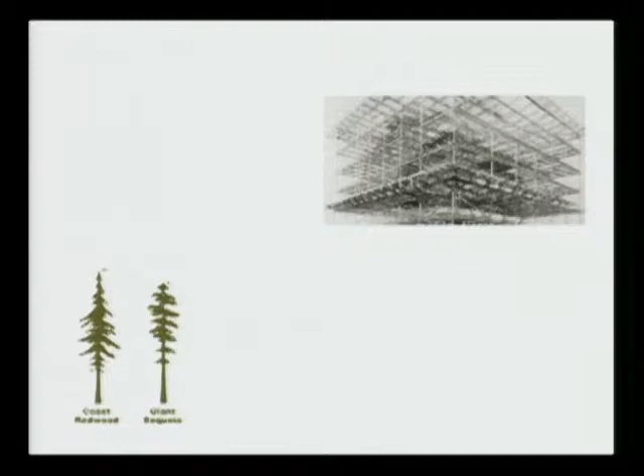Buildings are kind of like that too. We didn't have tall buildings until we had the physical resources—the structural systems, the mechanical systems, elevators, the ways to transport people and resources up high. So our built environment is reflective of new understandings we have of our control of resources.

We even begin to understand these systems happening long term, beyond our lifespan. When a giant sequoia dies, it opens an opening in the forest and you get large groves of trees growing around it. Our cities aren't so dissimilar—when large keystone things change, we respond and marshal resources in ways that reflect that, though we're not always conscious of it. But with technology expanding our understanding of change over time, we've been able to see some of these things, especially in the built environment.

Arguably, this has led us to some pretty interesting conditions, places we haven't ever been able to occupy before. We live in environments that have been previously uninhabitable. That presents some really interesting opportunities for us, but it also presents a risk that we become disconnected from things we used to take for granted, understandings of our environment that just came from being situated within those environments. Now that we have the power to overcome them, what do we choose to do? How do we use our resources appropriately?

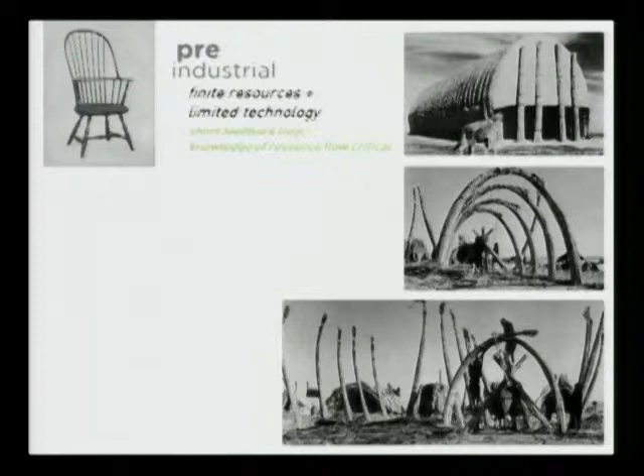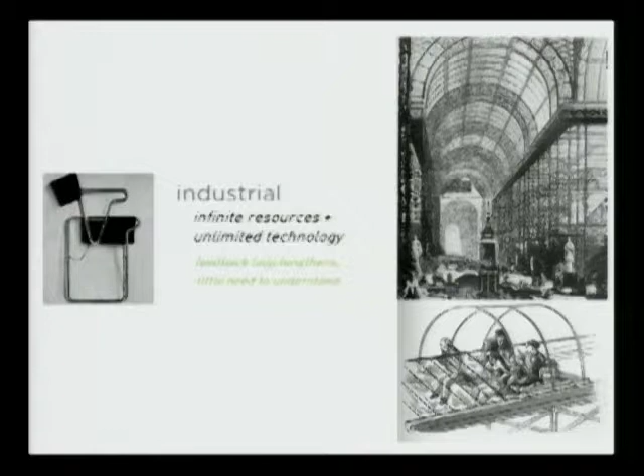And you can look at architecture as having some of those qualities too. Certain architecture results when you have limited technology and finite resources. We often refer to this as vernacular architecture, but it can happen in any scenario. Certainly with the Industrial Revolution and the disconnection, the creation of building trades and building professions—architectural profession, landscape architectural profession—are products of this period of specialization.

And then lastly, a kind of new sense of needing to look at the bigger picture and ask larger questions, because we recognize that feedback loop is not there anymore, and we need new means of understanding how we relate to our environment because we've made it in a way that we don't have to. So if we don't have to understand it, how might we choose to understand it? We have to be more attentive to our feedback loops and to our environment.

We shape our buildings and they shape us. So I'm going to kind of shape this outcome by shaping our buildings, by shaping this particular space. And we have to acknowledge that they do shape us.

So let's think with architecture. We've thought with pictures, we've thought with artifacts, let's think with architecture. And ask some questions: can a building be a tactile demonstration of ecological principles? Can it show us things that we might be blind to and might not see otherwise?

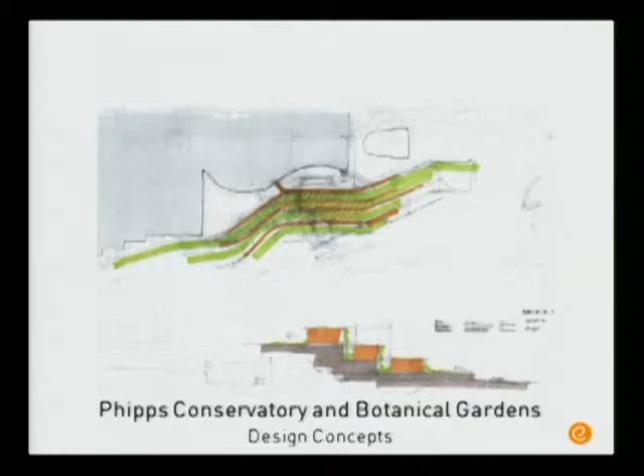So it was out of those sessions that design concepts are generated, and an amazing thing happens because the mechanical engineer is thinking about parking and landscape design, and the landscape designers are thinking about where the ducts are going to go and where airflow is coming out. Everybody has to think from their expertise but in somebody else's shoes, and that's a really important thing to happen.

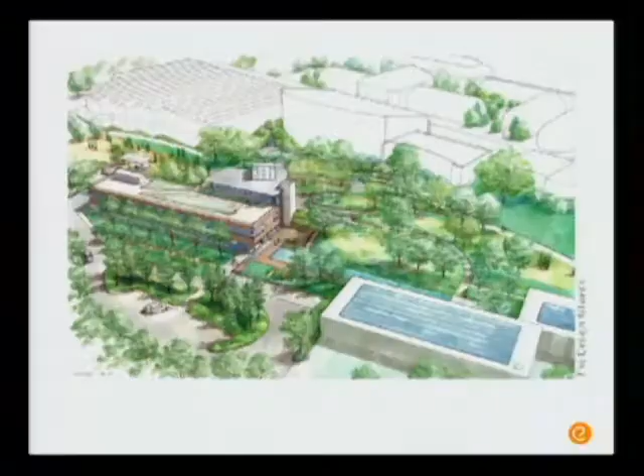So the resulting thing, if you remember those buildings in the photograph, those are down here. They're reused. That was a commitment that came out of this early charrette integrated design process. Unequivocally, Phipps was committed to saving those buildings, so that put everybody on the same page at that time. What it resulted in was an office and classroom space, extending the visitor experience out of the conservatory with both this building and the landscape part of it.

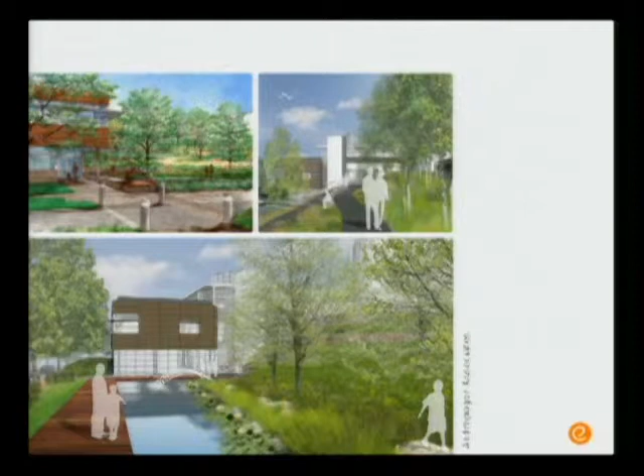And so the building itself that's coming online has a lot of interesting features. But the features couldn't have happened with just the systems alone - it's not a very big building, I think 21,000 square feet. The systems aren't so high tech that they're things you don't already have here on campus somewhere, right? But it's in the way that they work together that's where the special sauce of the LBC is, because if one thing isn't working, other systems are not able to capture their return based on those things working together. So let me walk you through some of these things.

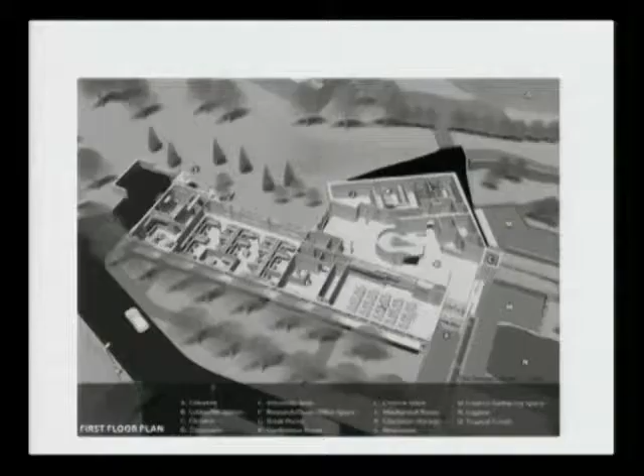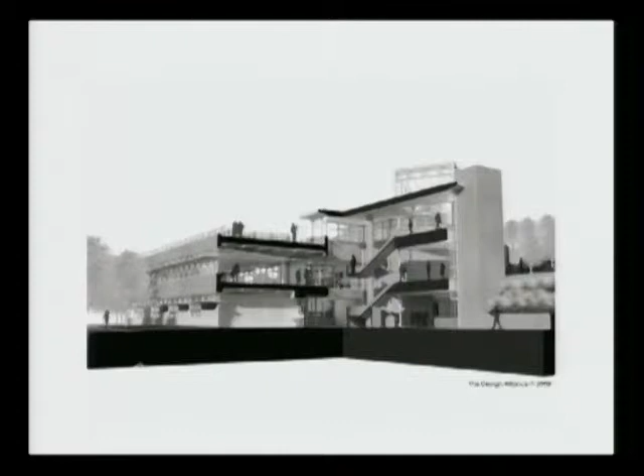This is the floor plan, just a little bit of the classroom space, then office space, and then a green roof demonstration space on the upper floor. It has things that are important for understanding what the possibilities of this space is.

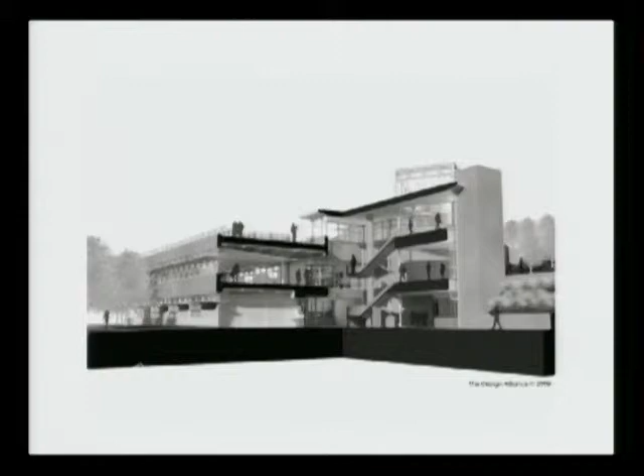For instance, this tall tower, the upper part of that massing, is a stair tower, and one of the things that the client and team said is, what if that thing doesn't have to be fully heated and cooled? Nobody's desk is in there, we just walk through that space, and we might even have some plants and living systems in there that would not want it to be that warm or that constantly monitored. So what if we just take that thing offline? We don't have to condition it to the same level as everything else. Let's talk about some of the other kinds of systems and occupancy matches that we can make.

But one thing that the team came to, and in this other project we're working on which is just the beginning stages of Living Building Challenge, it seems reified that this is an important step to take for Living Building Challenges - you have to work the passive strategies before you work the active. A lot of times we get excited about a technology and we want to do it in the project, but ultimately, the concept of negawatt we were talking about at lunch, it's the energy you never have to buy. If you can create a building that is as sipping lightly as possible, then you don't have to buy that extra solar panel, and there's your return.

I think it's probably true for here, but in Pittsburgh, the most efficient building is a box with no windows. That's probably the thinking behind that school building that I showed you. We know that's not an option. So there's a balance between understanding performance, human occupancy needs, health concerns, aesthetics, and therein lies the essence of the design process - figuring those things out.

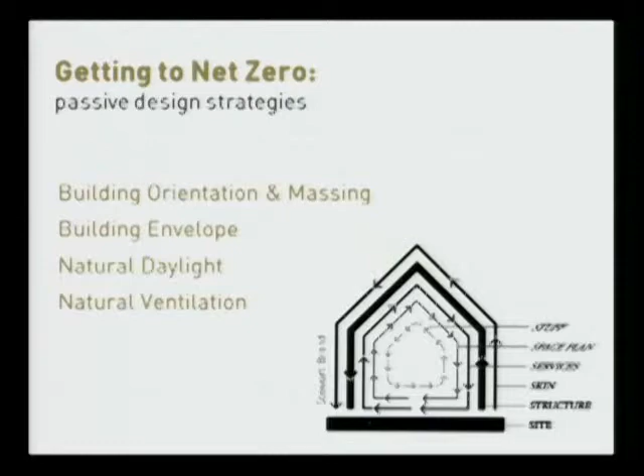So when we're making decisions on getting to net zero or living building challenge, certain things have to be done well from the beginning because we're not likely to change them. Truthfully, stuff, a solar panel can be stuff, right? We're really into that now, but 10 years from now there's going to be a technology that will outperform it by 20 times. That's a thing that's going to change frequently. So designing to allow for those shearing levels of change is really important. But 20 years from now, we're not going to change where that building's located and how it is.

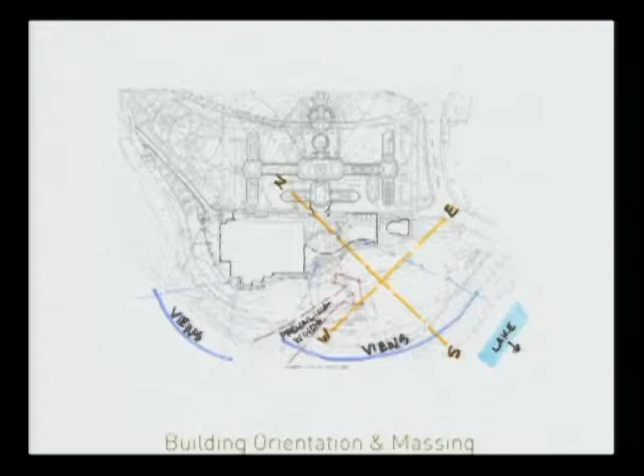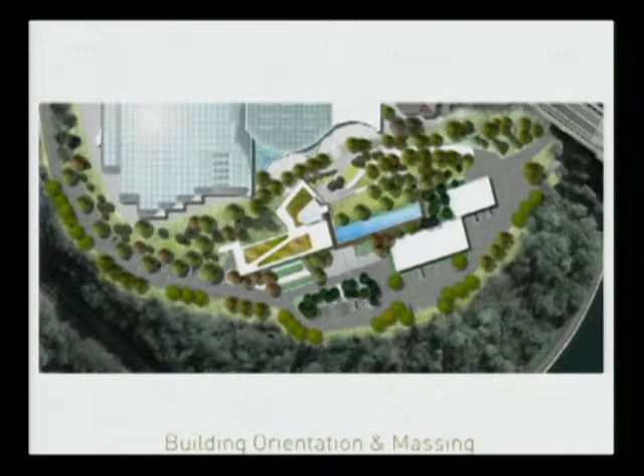So out of this process resulted some ideas of preferable orientation and massing, kind of relationship to the site and the park that surrounds it, and how to get parking out of the way as much as possible—things that are less likely to change. Thinking about building envelope, saying if we're creating this condition to the south, we better deflect light into the space, shaping our ceilings, things like that. I think the hospitality, the Marriott building, has some of these things also at work there.

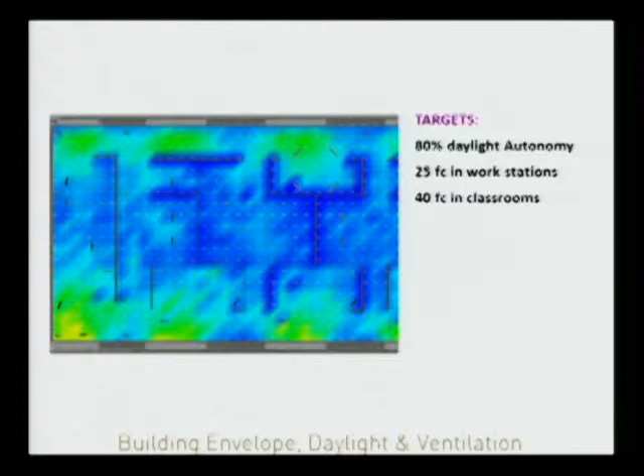One of the interesting things, one of the things I don't think living building could happen 20 or 30 years ago, is that we have a much better opportunity to do modeling and understand how systems perform, because you're always in a predictive role. You have to figure out how lighting's going to influence your HVAC, how much electricity you're going to have to buy, because if you're doing living building challenge, you have a direct feedback loop of having to understand how much solar panels you're buying for that. So you need to be able to model these things and be confident in that, and our tools today allow us to do that much better than ever before.

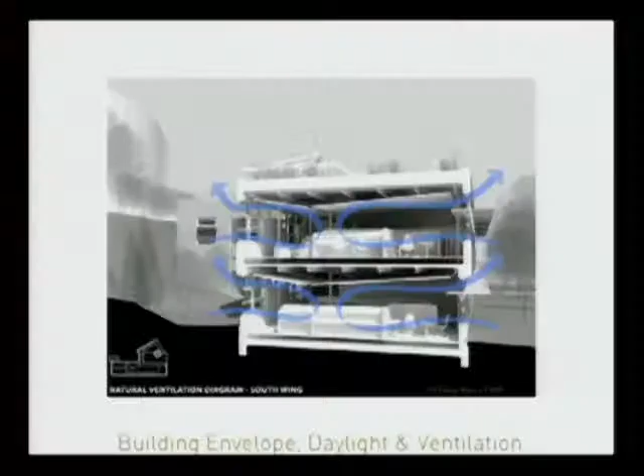Same thing with natural ventilation, understanding those flows in an intuitive sense, but also a kind of measured sense. In this case, computational fluid dynamics, a kind of section cut to model where that air is going to go, where the temperature gradient is going to be, how that works. That atrium, being able to ventilate and pull air from different parts of the building, was one of those big massing moves that had to happen early.

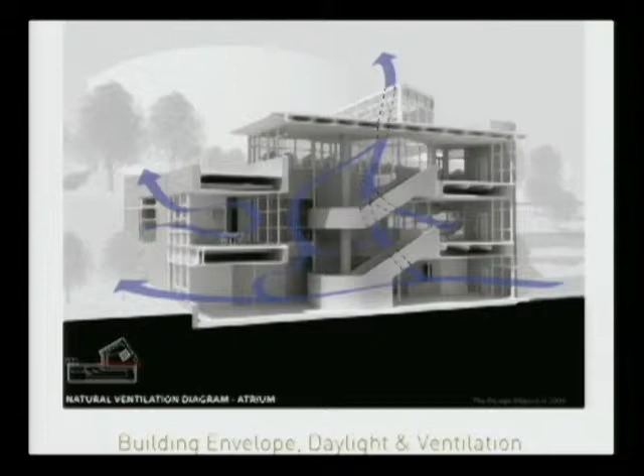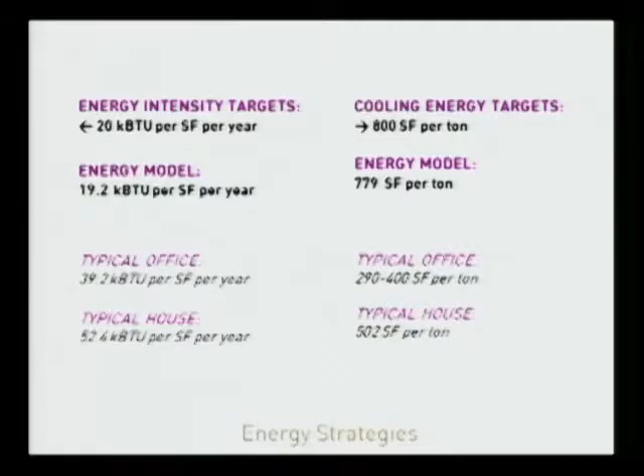So that you can get to these performative goals—but this isn't the stuff that people see. We can put the dashboards out, and the dashboards are great for people to understand how much energy is being used. But we perceive that energy, we perceive the quality of that space, far more intuitively than through numbers and quantification. So we need to do this, but we need to understand this isn't the stuff that's going to speak to the average building user.

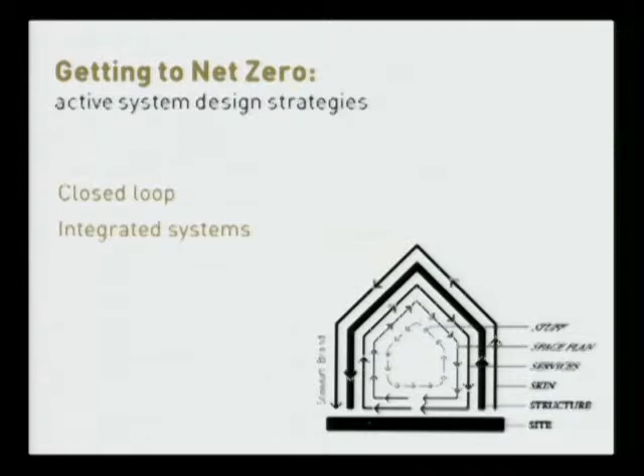So that we can get to very specific goals, we need to know what net zero is. Once you get past the passive systems, you get to active systems, trying to close loops and integrate those active systems, understanding where some things can benefit others.

Working with us on this project for Ross Reserve is an engineer, Alan Traugott from CJL Engineers. In this project, he recognized that the air being exhausted out of the building is exhausted at a fairly constant flow, and it always creates a little zone of breeze. If you stood outside of that, you would feel that constantly. He is working with a manufacturer to see about capturing some of that with a small turbine to offset some of that. That's energy, an energy flow that he was able to identify and think about in a different way.

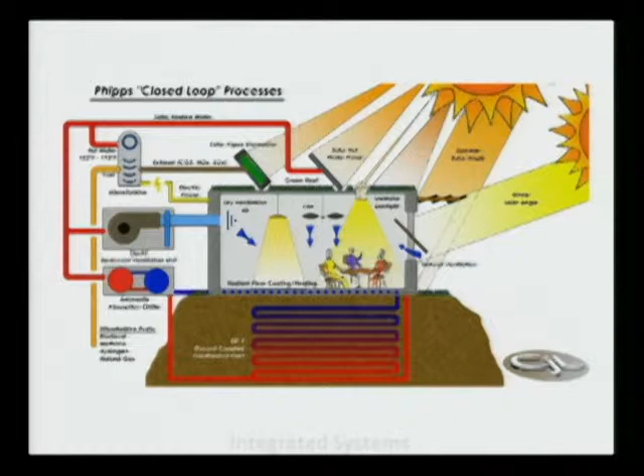This looks like a complicated diagram, but really it just talks about closing all the loops with different pieces and parts. If we can eliminate some of these technologies, that probably simplifies it. If we can decrease the load, we probably don't need as big technologies or as many. That's the idea of using passive systems as much as possible, then active systems. And these have implications over space.

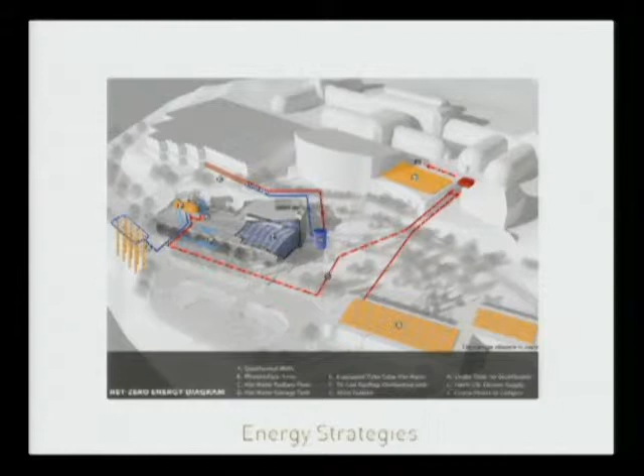One of the things that happened in this project, which would be true for any project here on campus, and to some extent we're going to try to think about this for the Ross Reserve, is thinking about a campus or adjacent things as a battery. Because if we have too much water in this project, we can use it to water plants in the greenhouse. If we have too much energy, we can feed it back into the main campus of Phipps because they can use that energy all the time. We have those kinds of varying loads in systems where we work together with different academic buildings. We're going to look at this structure at the Ross Reserve and the existing facility that's there and see if we have that opportunity to use that kind of battery storage capacity within our own system.

Metering and getting extra solar energy, sending it back into the grid is a similar idea, but how can you capture that within your own campus, like the Phipps campus?

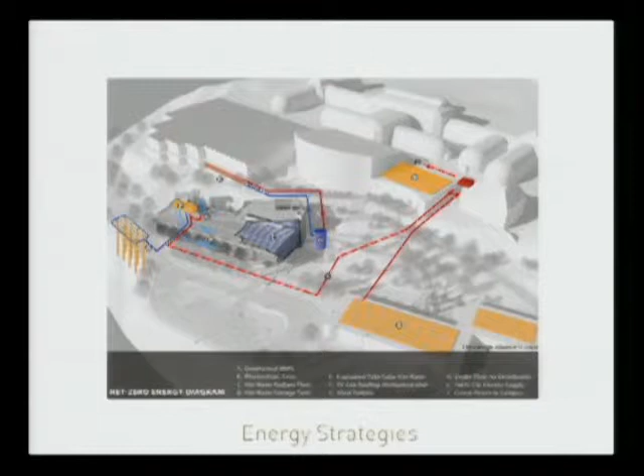So this actually doesn't look like this anymore. It's almost done and going to be opening soon. There are some great videos online if you're interested in learning more about it. I encourage you to actually come and visit—that would be even better.

One of the things that Phipps really brought up though is the relationship to a larger context. In this case, Phipps sits on the edge of a park, within the city of Pittsburgh. It shares a heating plant with Carnegie Mellon and the museums, and it's interconnected. LBC is not an off-the-grid approach—it's an integrative part of the systems approach. It can be off the grid, it can be completely separate, but chances are it's going to acknowledge that you're part of a larger system.

The second project I'm going to go through is not building-focused, it's neighborhood-focused, for a neighborhood in the city of Pittsburgh. We'll call it the Living Cities concept. Like most communities, it's a community that has a lot of stories already written on its paper. It's a place where we look to see where things were making systemic sense and where they weren't. And of course, the fact that there are neighbors and people living there is a pretty important piece of it. How do you engage these guys? In a building, you just have the building stakeholders. In a community, you have people who don't even recognize that their built environment matters. So how do you engage these folks?

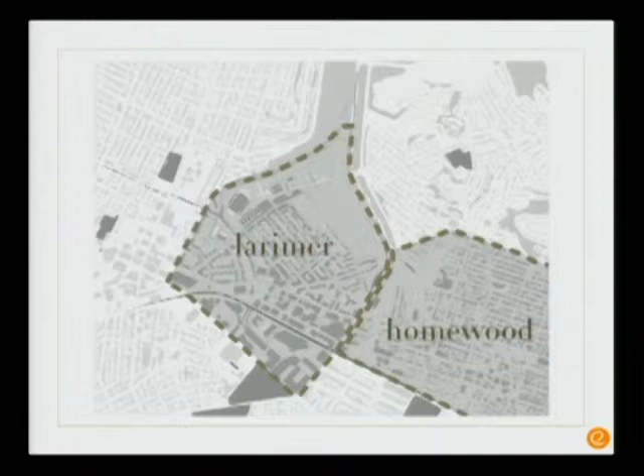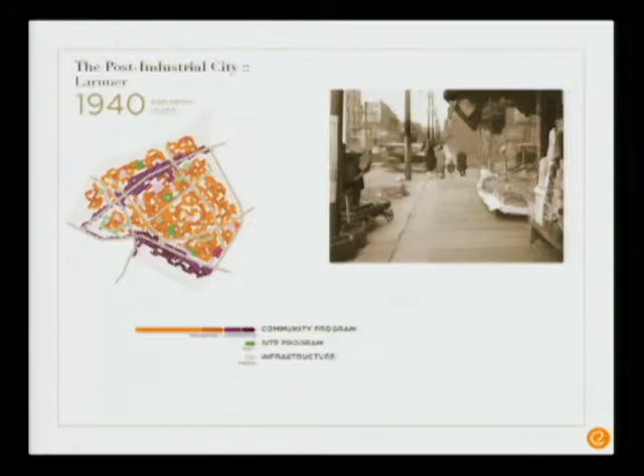So Larimer, if you see the kind of denuding of this, began here with each of these little squares representing density. The purple is commercial, the orange is residential. In 1940, there were 13,000 people there, and it looked like this. Throughout the decades, it's gotten less and less, so that today there are less than 2,000 people there. And this school looks something like this right now.

So this is a tough but not uncommon situation, especially in former Rust Belt cities. How do you deal with that kind of change in the community and disinvestment?

Right now, the community is seeing some reason to believe that change is happening and some growth that is beginning to occur there. Part of it is due to internal efforts that they're making. Part of it is just due to a general economic outlook for the region as being somewhat positive. So what we did is look at stages to how this growth might occur, how they can control it, and how it can use these principles of the living building into a living city.

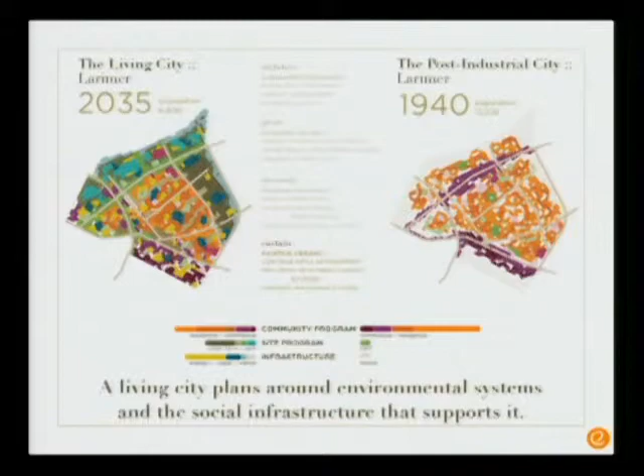And so in 2035, this is the kind of looking at the end, kind of a diagram of the end design. In 2035, you've got, just look at the colors of this. It's far more diverse. The ecosystem, if you will, of what is in this community is far different than it was in 1940.

And what you're seeing there is attention to a couple things that never got designed in 1940. It is site, thinking about hillsides and open space as working spaces, whether that be for water or for food production, thinking about distributed energy and infrastructure. Where do you take care of your sewage? Where do you take care of your water? Where do you produce energy? How those things might take place at a smaller scale because there's more efficiencies there and build more resiliency for that community.

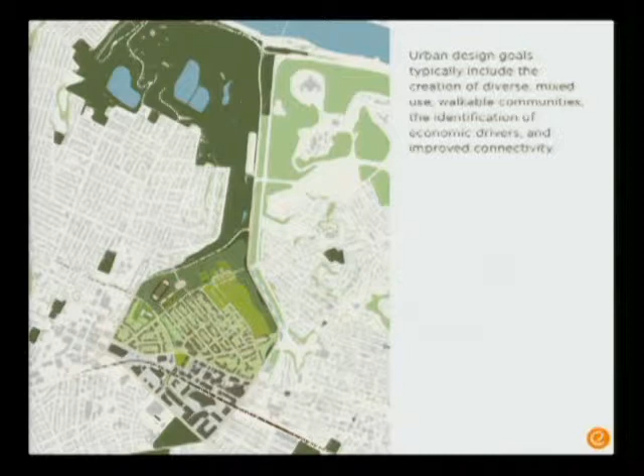So in a typical urban design process, you look at all the pieces and parts, you see who lives there, you see where the vacancies are, you see where the economic issues are, and you kind of design in a way that takes into account things like open space and recreation, different uses, transit, things like that, and those are all still very important things in this type of planning.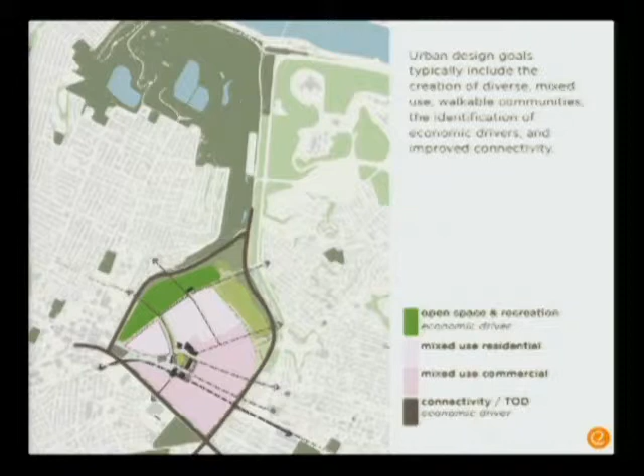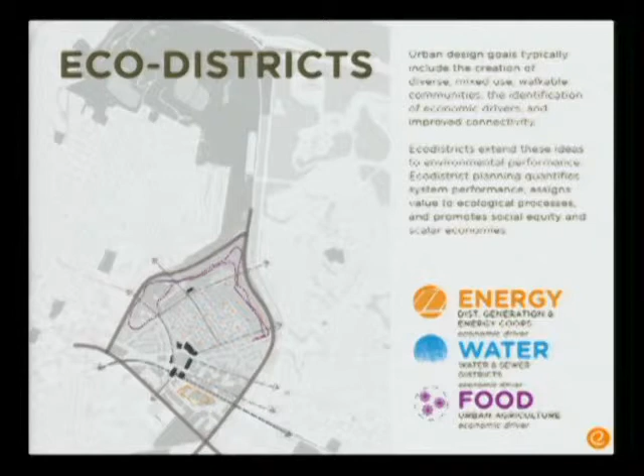But the thing that's different is that as per the Living Building Challenge, you have to think about things on a broader systemic scale, and you'll see two things that are recognizable, energy and water, because those two things are still very important at the district scale. Food didn't come up at all when we talked about buildings. What we talked about was materials. In a neighborhood scale, materials is important, but those are decisions made down the line. But food is a major infrastructure piece and needs to happen. Those decisions need to happen at the large-scale planning level.

So what we've observed is that technological innovation is often how we start talking about sustainability, but really community formation is the difference between making these things work or not work. And similar to the way that I talked about the integrative process and needing to come together on things, there's a kind of corollary to that in urban design.

When people think about eco-districts, if you've ever heard the term or thought about sustainability issues as a district, you'll hear things like vacant lots and planting gardens and doing some geothermal, some solar panels. And you kind of throw stuff at the wall and see what sticks in an urban plan. And there's a vacant lot, it's going to be an urban garden. That's great. Those are good things to have happen.

But there's a logic to how these things can be done, and that has to do with community capacity. These things are organized by time frame, how long it takes you to do it, how much time you need to have somebody to advocate for that thing or to maintain it, and then the capacity of the community to do it. Do they have decision-making mechanisms in place? Do they have organizational learning? Can they communicate about it? Do they have legal structures in place? Do they have financial resources?

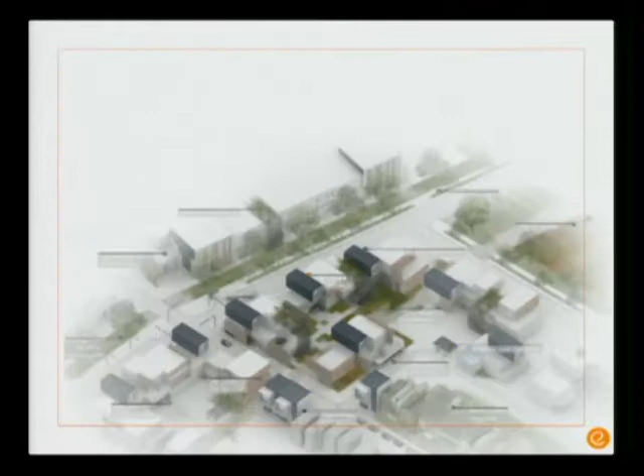So thinking of things not just as solutions but as systems, testing quantitatively. In an urban design project, you'll test economic models quantitatively, but rarely will you test how much energy it takes to take that community to net zero, and if you did, what would it look like? Wow, that's a lot of area. Those squares represent the area of solar panels overlaid on the plan of the community. Could we even do that?

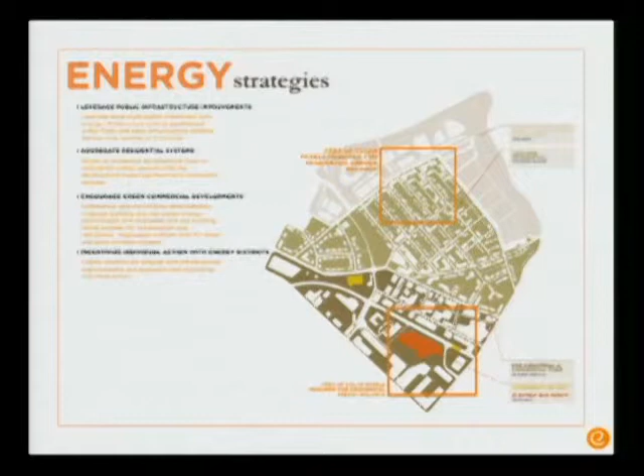That probably leads us to believe, as it did when we looked at this, that we're really looking at interim technologies. We're looking at cogen, other fuel cell technologies, other things that have to happen to make this work. How do you structure the community agreements? How do you understand who's the best entity to take a look at that and put that part of the neighborhood plan as their first priority together to see this happen? Because it's not going to happen with every homeowner putting solar panels on their roof.

Likewise, when you look at a detailed part of any of these projects, there are certain projects that, because they carry infrastructure investment opportunities, should become the spark projects. Whether it's public investment, like fixing up a school or putting a new field in, that could also hold stormwater and maybe be part of a geothermal system that's put in, or whether it be a new development project that finds its way out into incentivizing community participation in solar panels, or extending the geothermal infrastructure out physically so that other existing houses and units can tap into it.

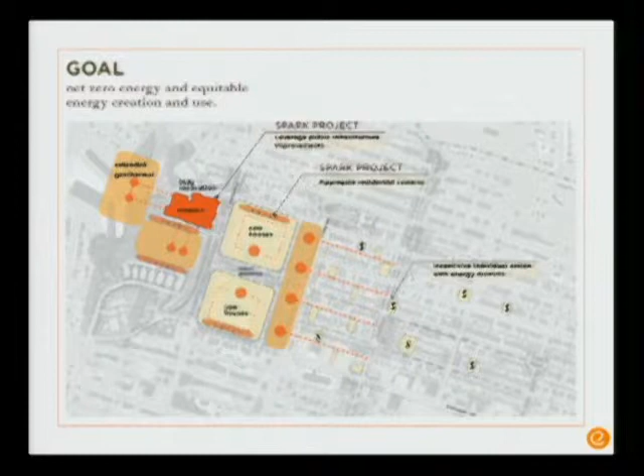This represents new business opportunities. It represents new kind of regulatory things that need to be in place. And for communities like Larimer, who have a plan and a vision, this is where they want to be going.

So much water came off of this neighborhood and other neighborhoods in that sewer shed that down in the valley, the water rose so fast that the 4-lane roadway flooded so fast that one woman got sucked down the sewer grate, and a whole minivan of a mother and 2 kids were submerged so fast that when they sent the rescue boat out, they didn't even know her car was there. That is not something that happens or should happen in a 21st century city.

And it's something that we can solve by thinking about infrastructure and living cities at this scale. How do we think about our resource flows as a community and set goals and take advantage of regulatory issues in a way that changes the infrastructure and performance?

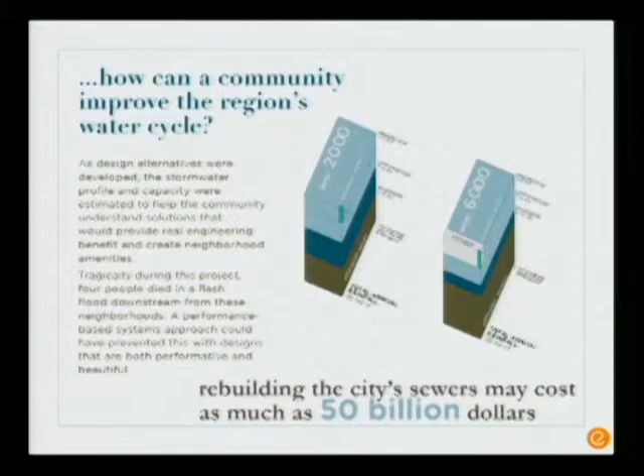So in this case, with 2,000 people, we have that dark blue band of water, that volume of water coming off, and with more efficient fixtures and with doing a lot of greening and cascading water storage systems, you can infiltrate the majority of that runoff water back into the ground. Instead of paying for a pipe and a $500,000 gate to close the road when it floods, let's at least get the community some benefit in creating parks and open spaces that are performative and also pleasant places to be.

And again, thinking about what the assets are in that community, how people can pay for things or not pay for things. Businesses have different capacity to deal with things. The water they get is different quality than what comes off of the residential district. How do all those things go together to create districts?

And when our consent decree to take care of our combined sewer overflow throws money into our system for dealing with stormwater issues, let's not pay for pipes. Let's pay for systems that support a larger vision for the community and not just an end-of-pipe solution.

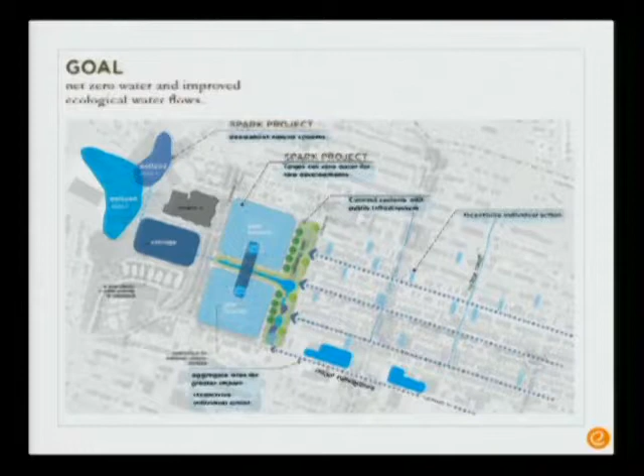With energy, this also shows that certain projects in a smaller area have the capacity to spark or catalyze other projects. Anytime you do a major infrastructure improvement, how does it spread throughout the community? Specifically in this community, how do residents gain more equity in their property, or buy in, or get equity in the community that they were never able to have before?

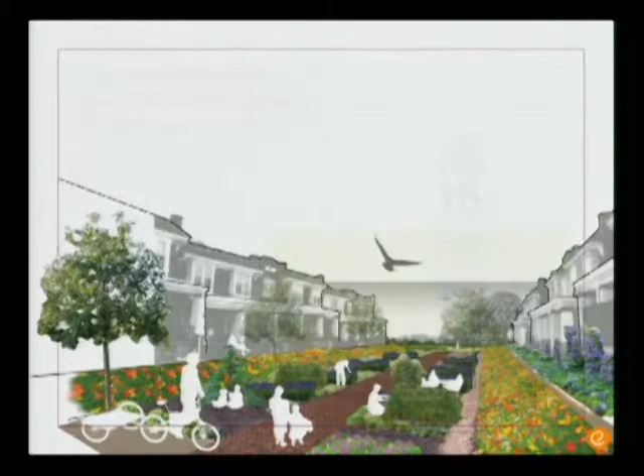Lastly is food, which is interesting to think about. We were up on the reserve thinking about food because you're surrounded by fields, and some of those are being used for food, probably also for eventually making fuel. But how do food and waste become part of the same cycle? How do we create systems and understand open spaces as design opportunities within this system?

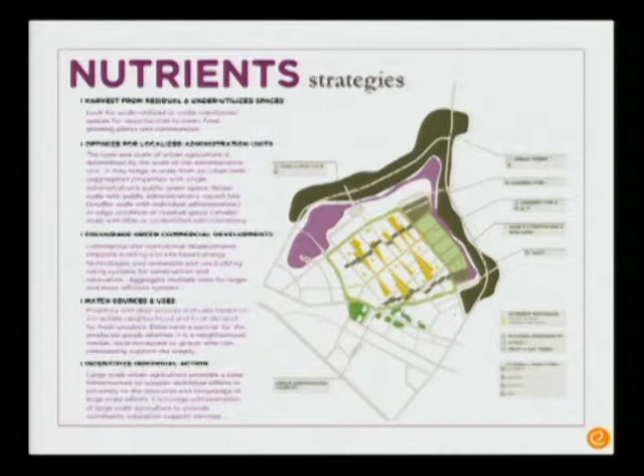One thing we talked about is the concept of a food forest—there's a movement in Pittsburgh where food forests focus on fruit and nut trees, high protein food, but calorie per calorie more efficient in production than some farming methods you'd use in an urban scenario. So how do we use every asset within this system, in this case the nutrients and waste system, to think at scale?

Every building in this neighborhood is not going to do Living Building Challenge, nor should it. But even a building that doesn't do Living Building Challenge, within this kind of eco-district concept, would have a chance at gaining benefit from those concepts.

So lastly, I want to take us back to the Ross Reserve. It's a modest program compared to a neighborhood or even a big facility with greenhouses like Phipps is. But it has a lot of interesting opportunities. The questions still remain the same: how do we think differently about the making of this place?

If anything, the Ross Reserve has this incredible capacity to connect people to this amazing resource. We walked through it this morning, and it's fantastic—so many stories and amazing places to experience. How do we use this facility to help people connect to that?

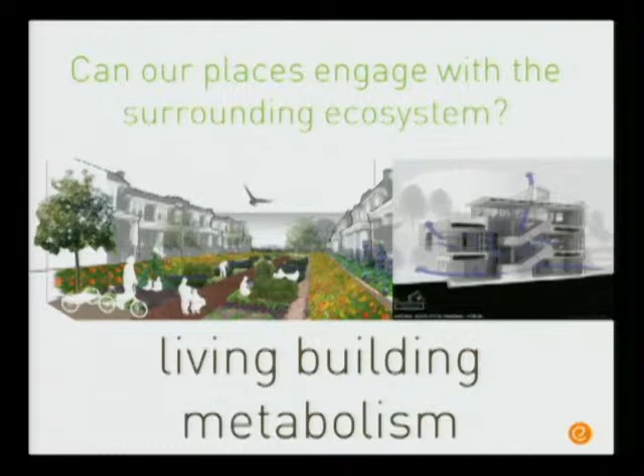Asking those same questions: can our places be tactile demonstrations of ecological principles? Hopefully you've seen some of that in the projects going through the Living Building Challenge process that I presented. Secondly, can our places engage with the surrounding ecosystem, whether that's living material, food-based, or energy flows and resources like air and water?

And lastly, can the way we make places change the way we think about each other and our environment, connecting people in place? Not just connecting us because we all work together to make this place, but connecting the students who will come ten years from now to a place because somebody now thought about it, understood its specialness, and created a scenario by which someone could come in the future and tactilely and haptically experience that place, changing the way they think about this whole region.

We have to be more attentive to our feedback loops. We have to create living buildings, and not just the way the LBC defines it, but thinking about it more holistically.

We need to see forces and flows and think in systems thinking. That's where all the great research here on campus, and all the folks engaged in technical issues, come in—they have an amazing capacity to see how these things work.

I can tell you that Carrie understands the systems, forces, and flows of the ecology on that site, and why certain plants move in certain places and the animals follow or don't follow. That's an amazing resource, but people can look at buildings, people can look at larger infrastructure issues and see those things too, and they need to be brought to this question.